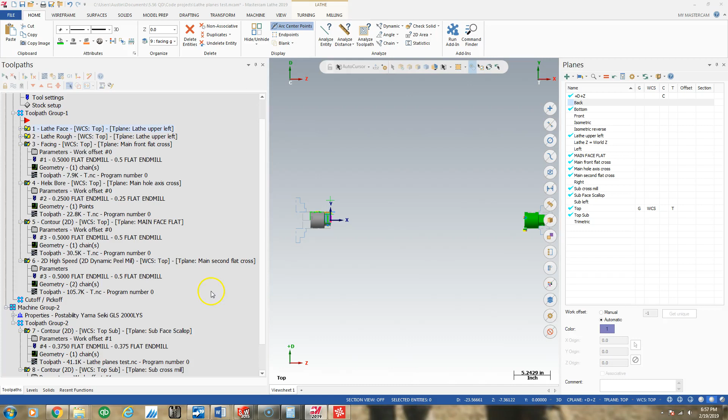So I wanted to try to cover lathe planes, Y-axis cross face, and cross face sub planes. This is something that took me about 2 years to learn. There isn't anything publicly available on it.

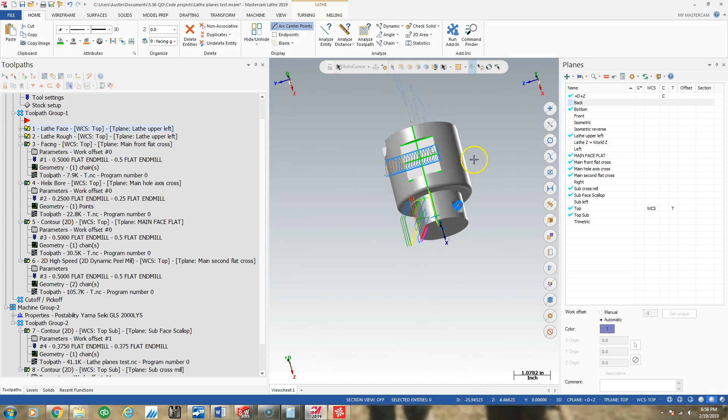What I've got is this part here that has various surfaces I basically designed to demonstrate some machining operations and plane combos. You can see the part - I've got a scallop on the back side, a cross milling operation on the back side, a face or cross operation on the front face. I have this helix bore that's offset, and a peel milled and finished flat on the side of the part.

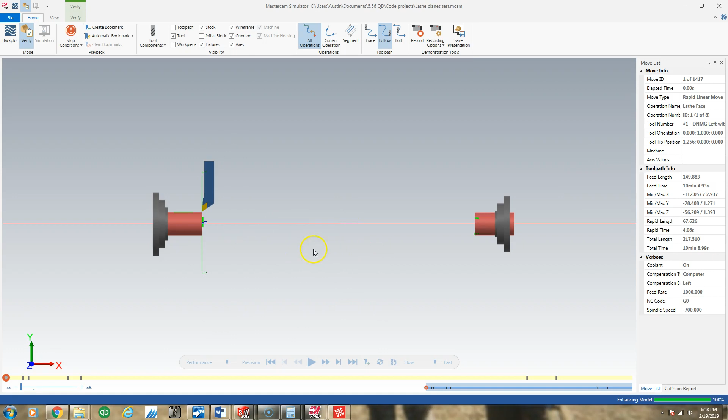And here's what it looks like when it runs, to give you an idea. We'll drop the speed just a little bit so you can actually see something happen here. It roughs, finishes, puts on the flat, so the cross turn, does a cross helix bore.

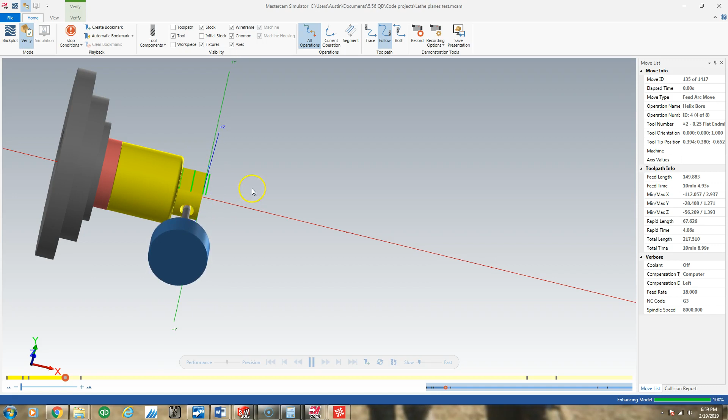Then we do the flats with a face mill operation to demonstrate those plane combos, and peel mill the flats here on the side of the part. And here, I'll give you a little speed.

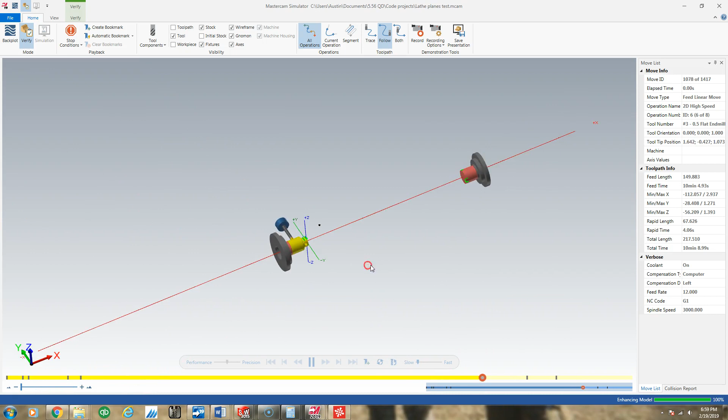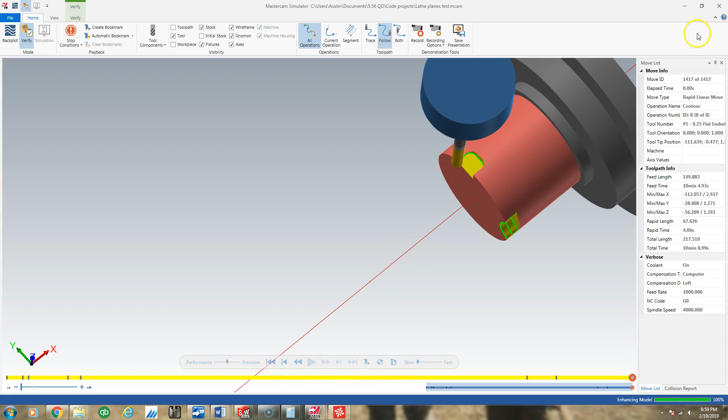Then we'll bring it back down and try to get the view orientation for the other side of the part. And we come in and 2D contour the face scallops in Y-axis, then cross mill the little feature on the back side of the part. So that's the gist of what we're doing.

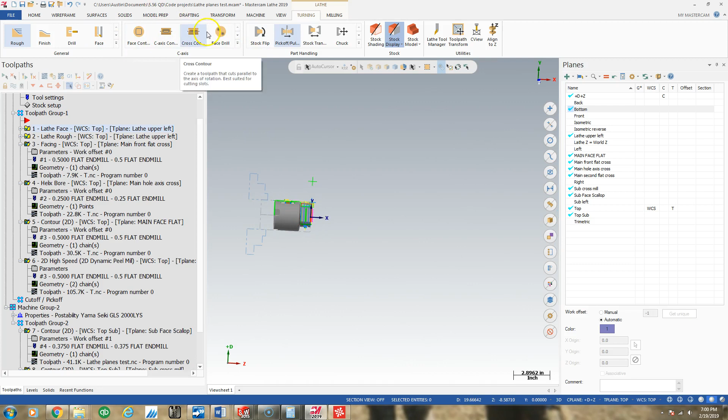Basically the best way to explain these operations is that the lathe menu in Mastercam has this kind of hopeless little dialogue of shitty operations that might populate properly, or might force you into a call with the reseller, where you basically become the idiot who trusted one of these buttons to try to do something with the software. And that's not fun.

And these are all C-axis, like it's the 80s. People have Y-axis machines now. So the Y-axis operations require a programmer who understands planes and milling operations, which opens up your ability to do all this stuff - dynamic operations, thread milling, 2D roughing, peeling, face mills, and multi-axis operations, some of which work better than others in lathe, and some of which don't work in things like mill turn. But mill turn does help you out with planes, so you don't have to know this kind of crap.

Anyway, we're 3 minutes into the video. Sorry for the waste of time, but we'll take a look at our first operation, probably, if Mastercam will cooperate with us.

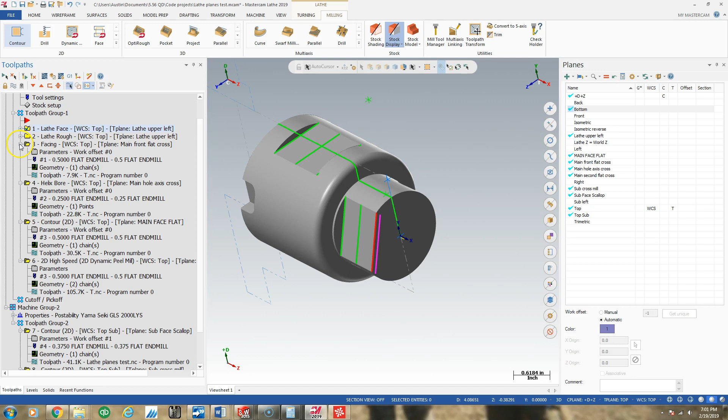Okay, so we face, we rough, and get to the face mill operation. So the face mill operation is a cross operation, so the plane you need for that is this - let me see, main face flat.

That's what I made for it, and basically I have this little document I tried to figure this out with. So for a cross mill in Mastercam, we need a copy of back, with X pointing toward the main spindle and Z pointing the orientation of the tool coming in to do the work.

So back looks like this, and our plane for that, let me see if I can find that - looks like, let me see, back. So that isn't, let me see - planes, main flat, front flat cross, okay. So main front flat cross is my plane, and back looks like this. As you can see, we took a plane much like back and rotated it for main front flat cross. You can see the resemblance.

So Z points at this plane, but the easiest way to make this plane is by clicking on this gnomon here, placing this plane - X points to the back, so we go X 90, and enter. That didn't work, so I'm going to drop that.

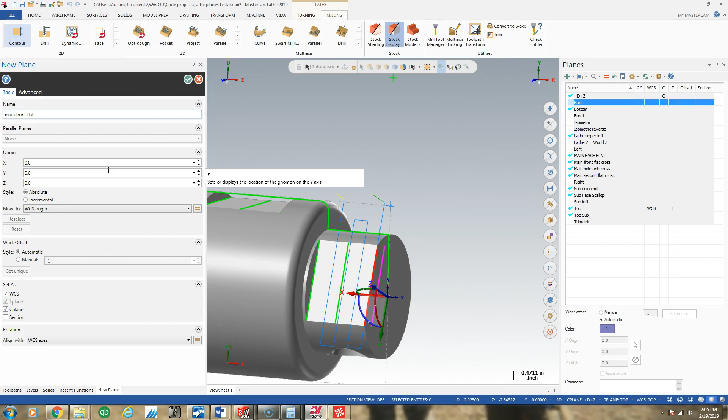Okay, so it was a copy of back, like I said. I didn't actually want to keep it, so I'm going to delete that before I get screwy here. Delete. Darn it, just delete. Plane is in use. Okay, can't be deleted.

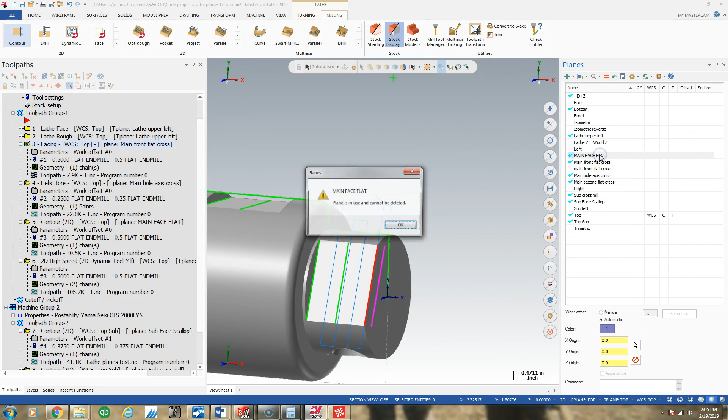Okay, so because they both have the same name, it thinks it's in use, even though it's... or maybe it's this, I'm sorry, so it became active. Delete. So let me see. Is in use. Okay, main front flat cross. There we go, finally get rid of it.

Alright, so that was how we made that operation. And that operation, we'll put the operations into another video so you guys can see how they were made. But for the purpose of this video, we're going to just talk about planes.

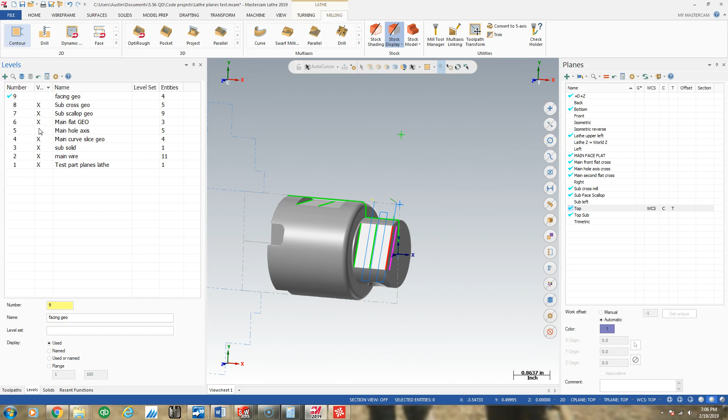My second operation was a helix bore, and that used on the levels manager the hole axis. So I created a plane that was again a copy of back off of this geometry here. The way to create that plane would be...

Plus button on planes menu. This of course uses a coordinate system that looks like back, but with Z rotated in to point at the top of this feature. The best way to create that is to go to plus, new plane from geometry, and we create a plane up here.

And we select an orientation that has X pointed toward the main spindle. Because it's a cross milling plane, we green check, and we would call this main hole axis cross, like this.

And then we would green check on that, click the gray ball, make sure we're in WCS top, and hit O on the keyboard, or auto cursor snap to origin. It won't drop down right now because it's not active. I'm not going to make the plane.

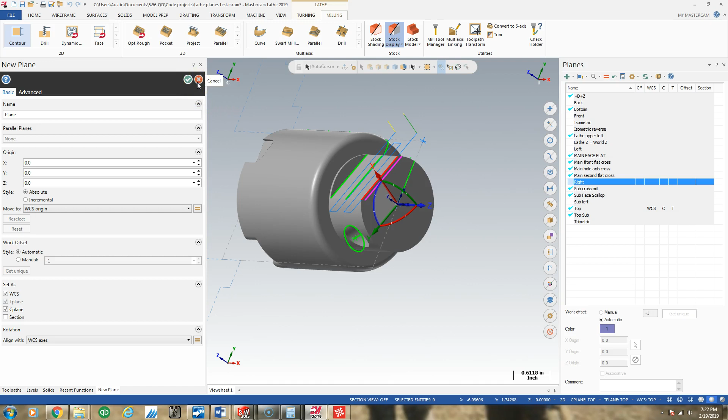We're in top, O for origin, and then we have a copy of... maintain a visual mental image of this. So you got Z this way, Y, X. I'm going to exit, and then we'll take a look at main face flat. So we got Z, X, Y, and that's how we cut that feature.

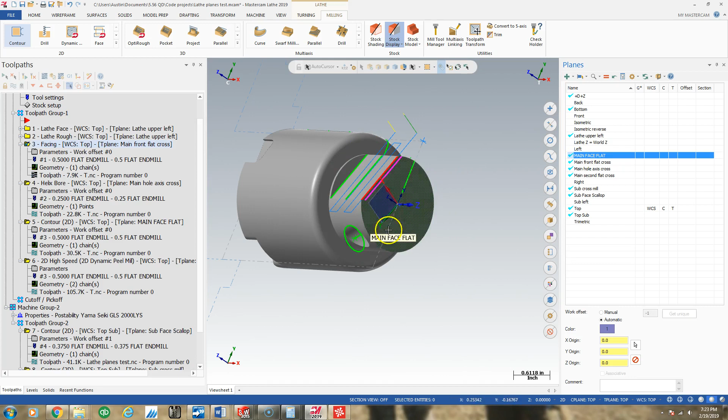Then we're going to go to the peel mill on the side of the part. That's going to use a cross plane again, so it's going to look like back, with X pointed at the main spindle, Z in the orientation where we want the tool to come from to make this cut. So again, we grab our dynamic gnomon by clicking on the gnomon, click on the face, and X has to face the main, so you go 90, enter.

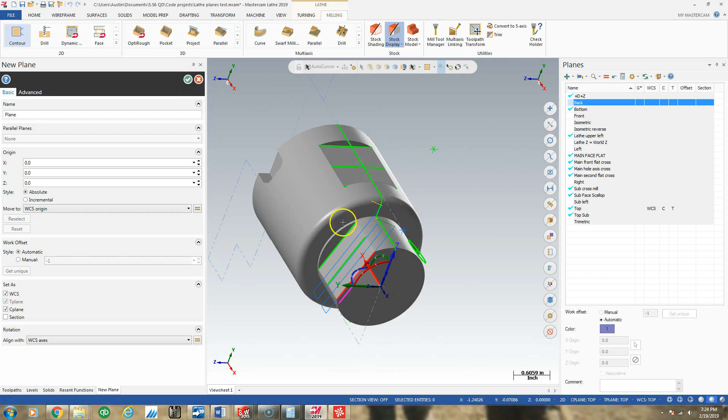Everything else is then right. Click the ball, make sure we're in WCS top, O for origin, and that's going to look like, maintain a mental image: Z, X, Y. We're exiting out, and we're going to look at main second flat cross, and that looks just like that.

Z, X toward the main, Y, and that functionally works. Now we get over to the sub spindle, and there's one of these planes I'm not 100% sure of, and I don't really know which one it is.

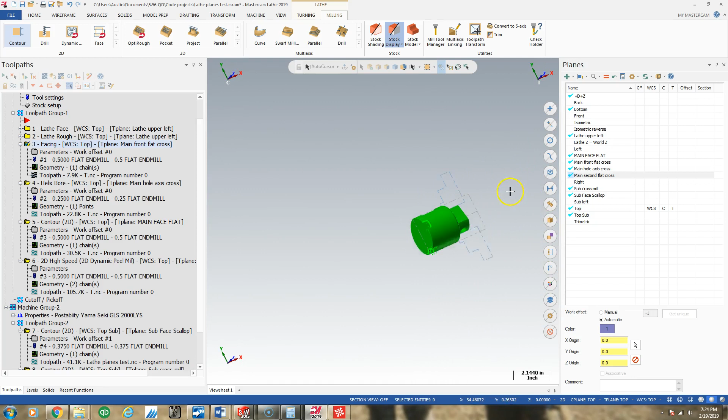I know that this first one is outputting 180 degrees. Now, these are the stupid things about the software. It'd be great if it just said, hey, this is C0, a little arrow out here. But there's no such thing.

I derived from a blueprint and referring to the software and the output of the code that 0 is probably on this Y part of the top axis here. So that's 0, this line right here. And everything on the front is correct to that.

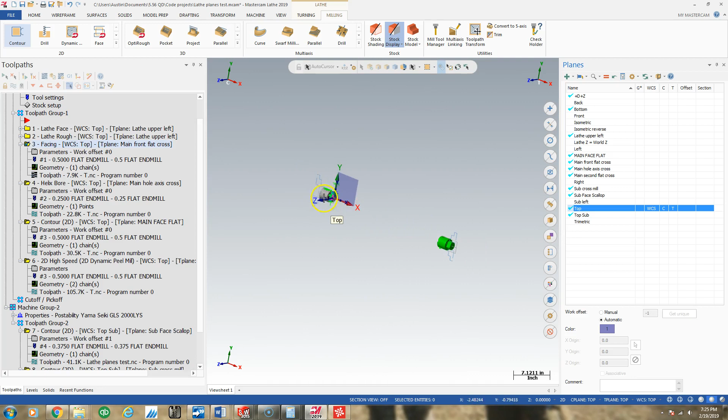Now on the front, on the main side, it never matters. You're always cutting a virgin part. It doesn't matter where the hell Fanuc sees 0, as long as the other features are all oriented in relation to the first feature properly according to a blueprint.

Well, not so when we get to the sub. When we get to the sub, these features have to have orientation to the other side, unless we do something screwy with our pickoff to fix it, which we can do. That's a bastard fix.

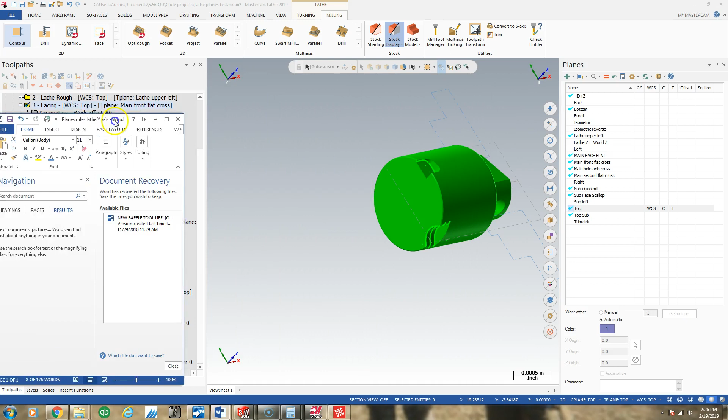But so our first operation on the sub is this scallop operation, face milling operation. And forgive me, I don't remember what the rule was. So as I said, one of these planes is wrong, or could be wrong. You know, Fanuc does some funky things.

It's outputting 180 degrees for this feature, which is exactly 180 degrees in this direction, and it's outputting 90 for this feature, which is 180 plus 90 is 270 degrees, which is what this is from 0.

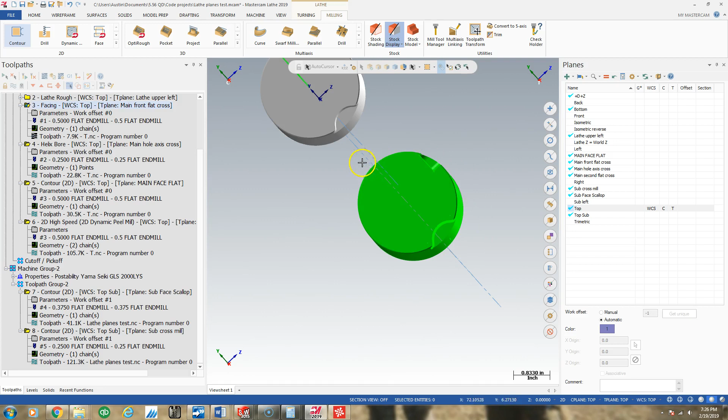And that may actually be the way Fanuc wants to read it, so it could be correct output. I just don't know the rule, which is why you should really have a reference material with the CAM package that explains how you check your code, because with C-axis I think a lot of people get confused.

So we're on the sub spindle and we're doing face milling. So for left, we use a duplicate of left with X pointing 180 degrees from geo center orientation of the feature being face milled, to output C rotation properly.

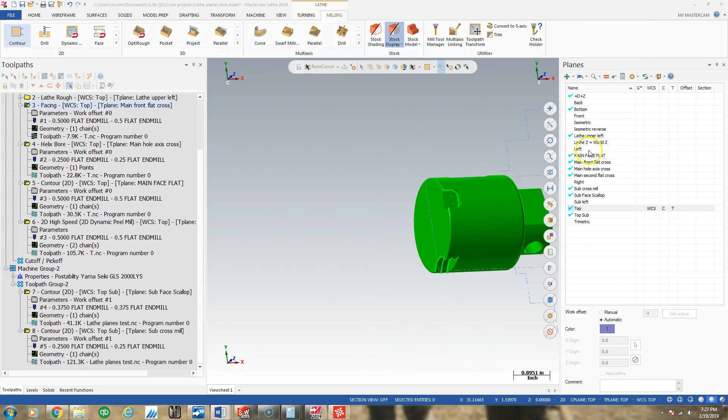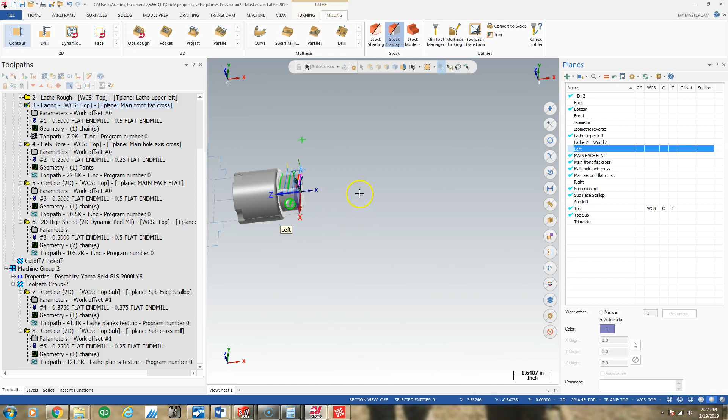So we grab our copy of left. We take a look at left for reference, and left is Z going into the main spindle, and X would be what we'd orient toward, directly away from the feature we're trying to cut.

So we'll go ahead and take a look at that first, just for the hell of it. So here's what we end up using: Z toward the main spindle, looking like left, just like we just looked at, and X 180 degrees away from this feature.

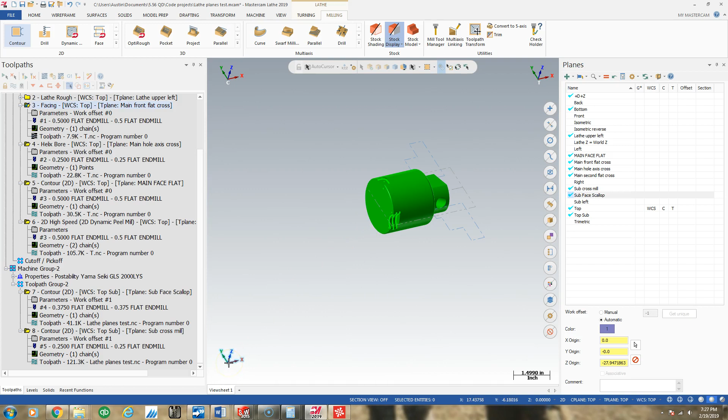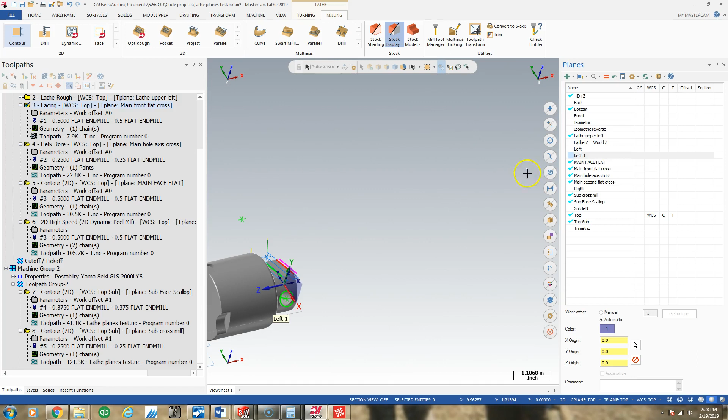And the way we create that is by, let me see, I want to say I actually duplicated left. So I got left 1, then I edited left 1 by clicking the origin ball. That didn't work, exit out. My left 1, edit. Maybe it didn't click for some reason because I wasn't right there.

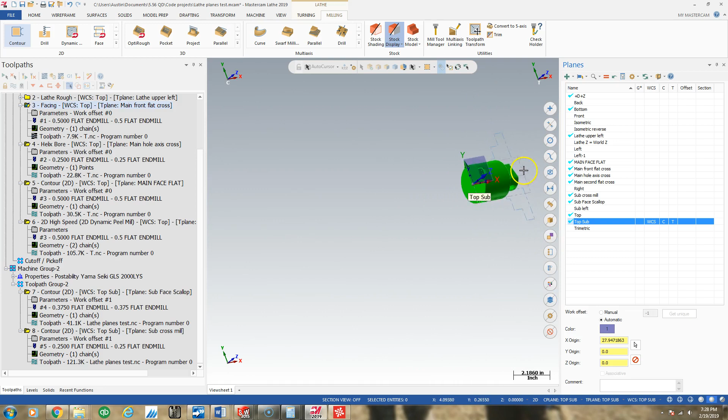Okay, so steering the part around, I could go like this. Well, that's not an option anymore. I could go to top sub, WCS C and T. Then I grab my left 1, edit, grab my gnomon ball, hit O for origin.

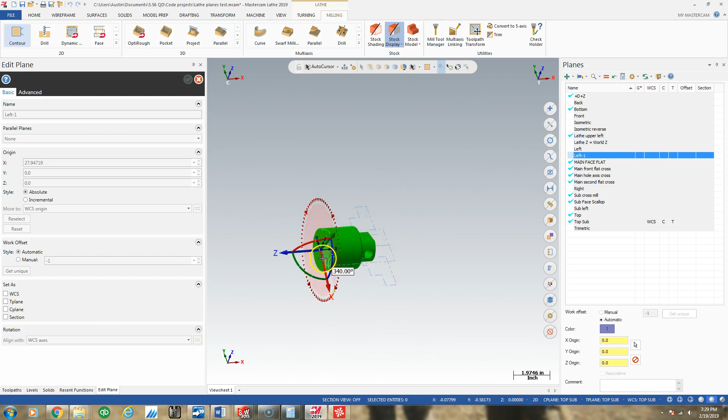Now see, it came across, and now what I could do is click this segment nearest the arrowhead. With my settings, like I explained in the auto cursor configuration, this is working where it wasn't yesterday, and I had to talk to somebody about why your software was working different from mine, and he was able to help me out.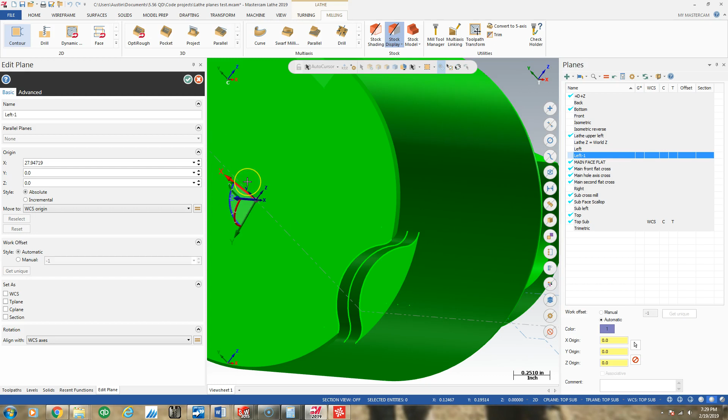I can snap to the center point of that arc. Then I can grab this middle segment and flip it 180 degrees. Enter. So I grabbed the segment, began rolling it, saw it was going to 180, now negative 180, and I typed 180. Enter. Now I could name the plane.

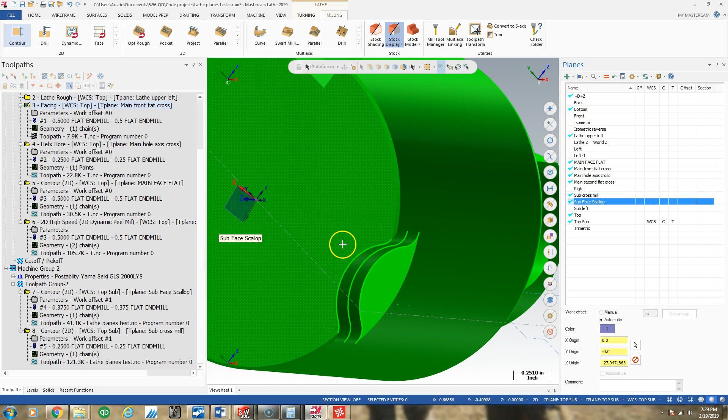I'm not going to, because it's going to look exactly like the next plane I show you. So subface scallop, here it is. Z toward the main, Y down, and X 180 degrees opposite this feature. This output the code that gave me 187 degrees, and I think that's correct. Now I could be wrong on that one plane.

There is nothing to check this against. So then my final plane, I used my lathe rules, and for cross milling in Mastercam on the sub spindle, I have a plane that looks like back with X pointing at the feature, with X pointing at the main spindle, Z pointing normal tool orientation of the operation.

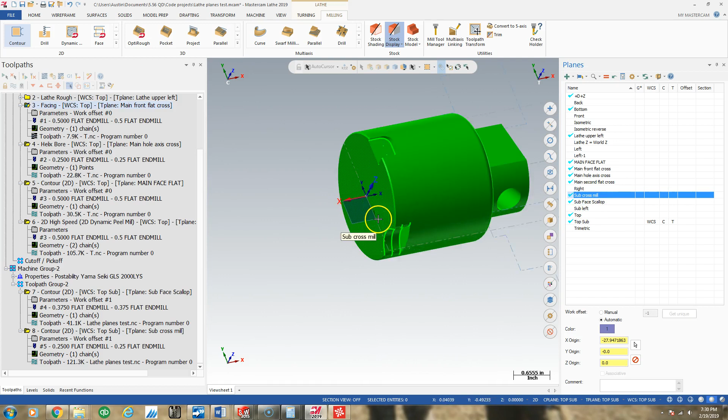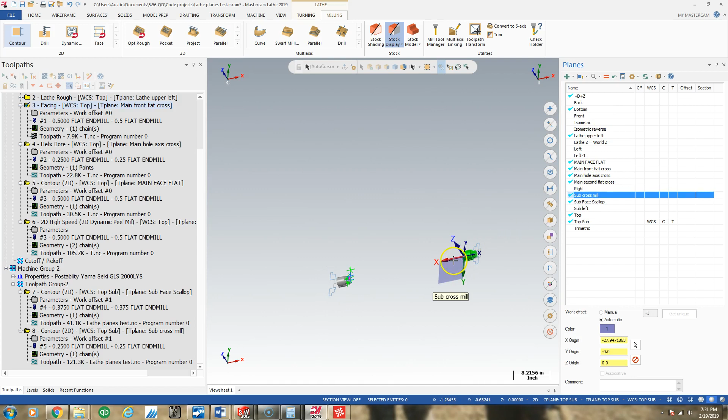So with that in mind, we'll just take a look at sub cross mill, and you can see it looks like back. We'll show you that in a second, but Z is facing this surface, and so this was good. So back, there's back, and here's cross mill, and so back is pointing toward the main, and all we did was sub cross mill was point our Z at the feature.

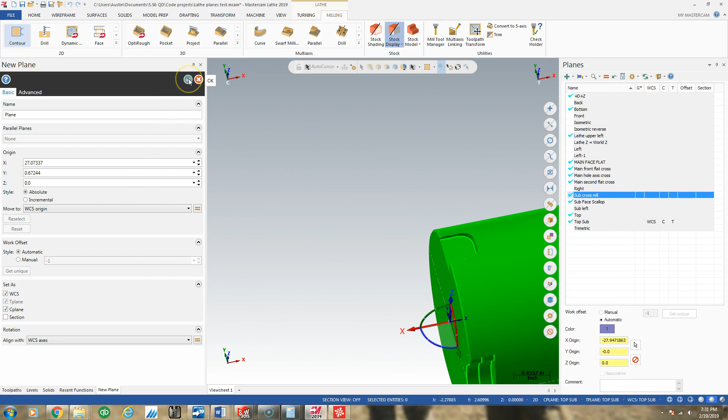But the easiest way to do that, of course, was to grab one of these guys, throw it up on there, make sure X pointed at the main, so negative 90, enter, and then grab the Gnomon ball, hit O on the keyboard with top sub selected. Now there's a trick for making all these operations, and there's the reference, same thing.

There's a trick for making these operations, and that I learned today by running into the face tool not working. You have to know what plane you're going to use for the feature you're going to mill, and you have to make it WCS and tool plane before selecting the operation you're going to use, or that operation, such as the facing operation, might talk shit to you and not let you do the operation.

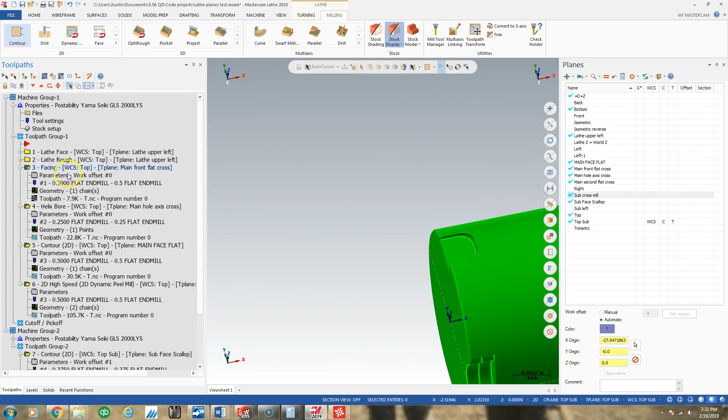Make those things active, and then when you're making the operation, you'll go to planes and it'll say main front flat cross all the way across. You got to grab top for your working coordinate system. I kind of think of this program like a stupid slide rule sometimes, and the working coordinate system is what feeds it where the hell zero is.

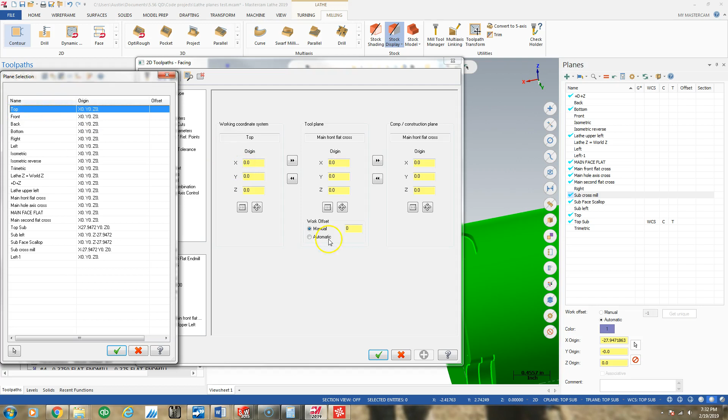So your code is going to come into negative Z, for negative Z if this is right. This is going to orient your tool, these two. But selecting them will make it all the way across. You'll have to grab your top, for example. And in all cases, I had to use rotary type Y-axis. And that tells it, hey, output a rotation before cutting the code using the Y-axis.

So, off the top of my head, the only thing I think, it doesn't even make sense to go there. One of these things, this is a peculiarity, and I don't know the answer to it. I have to check my other solution and see if that looked correct to know anything. And I think it was outputting 69 degrees or something like that.

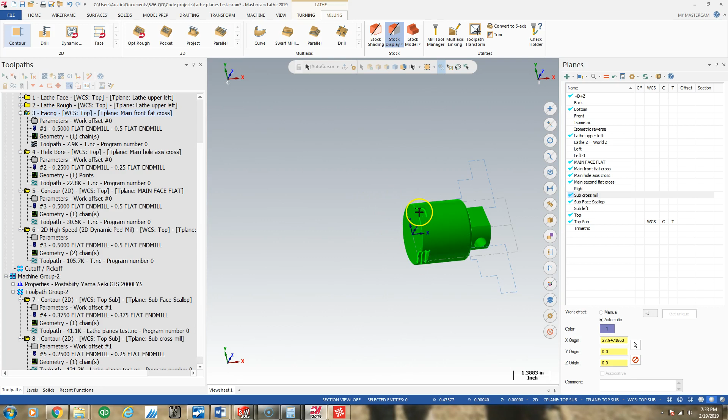For this feature, or 187. And 187 was something I could actually measure from origin 0, where the other tools were corresponding to on the main side. So I'm pretty sure this is correct. And this might be wrong, or it might be a peculiarism that it gets to a certain point and says, you know, rotate 90, I don't know.

Anyway, I hope that helps. That's where I've gotten to in 2 years of using Mastercam on lathes like this. I mean, a lot of bastard shit happened to get code out of the program. I corrected a lot of C stuff. Did some stuff that wasn't perfectly on point. Sometimes made edits at the control. It would be nice for this to work a lot more smoothly than it does.